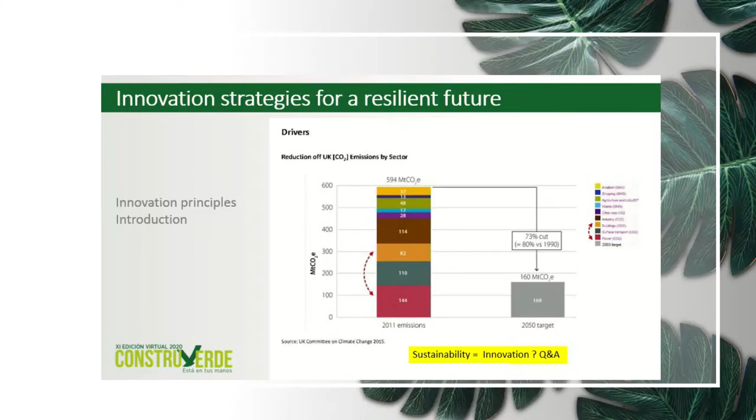This goes hand in hand with poor productivity in the construction industry. Again, an example from the UK as an average, where we now have an industrial strategy trying to help the sector move forward and improve a systematic issue of productivity, shortage of skills, and also inefficient building operational aspects, both on the building scale and the infrastructure.

So that gets us to thinking about how do we make those changes. I think what's quite interesting is looking at other industries and the definition of innovation. It comes from the Latin innovare, which means to make something new. That can happen in different ways based on different drivers. When we look at different industry entities, they position themselves quite strategically and clearly as it relates to basic research, breakthrough innovation, sustaining innovation, or disruptive innovation.

Now what I think we really need is a transitional model where we get from disruptive or breakthrough innovation into a sustaining innovation model, that then applies to different residential form and massing typologies, different age and context related typologies, or different ways of operating those buildings. That can essentially be currently mainly active, or passive, but what is probably most likely is that we see hybrid operational modes, where buildings utilize on-site resources but also draw from the grid or feed into the grid. Then we see programmatic categories and typologies, where I just want to talk about the residential for a moment. But it's important to understand the achievements we want to realize in these different sectors will differ depending on typology, program, and building use.

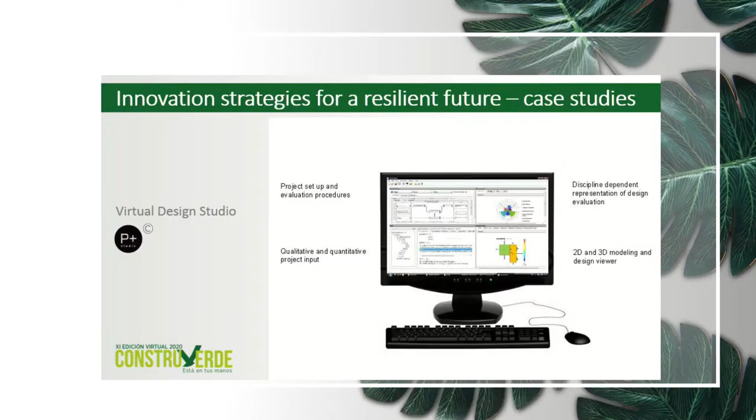We've used this for several years in our teaching, with interdisciplinary teams of students from architecture, mechanical engineering, structural engineering, and so on, exploring case studies based on this rationale, going through the motions of testing certain performance-based design ideas.

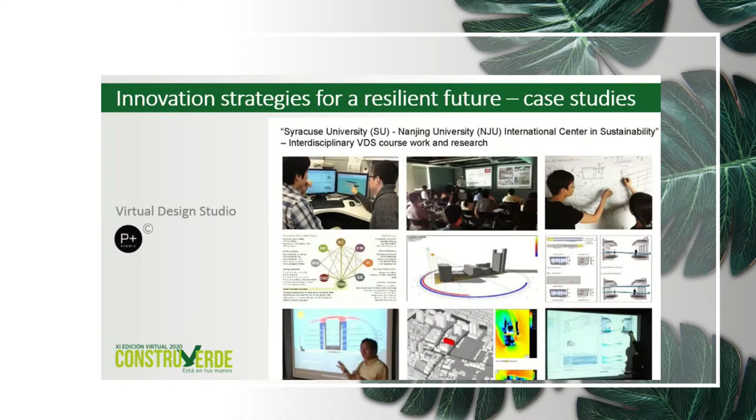If you're interested in learning more about this particular project, I recommend looking up Building Simulation, an international journal where we published this. You would find it under Virtual Design Studio, Part 1, Interdisciplinary Design Processes.

Work that we're currently doing at Cambridge, where we're looking to expand on this rationale by introducing aerospace value assessment methods, essentially a way of looking at the built environment very differently using aerospace design logic.

What we basically argue here is that the rationale in designing highly complex aerospace components could be applied to the design assumptions that we're making for buildings.

We're currently looking at what that can look like in terms of systems platform, but also in terms of visualization methods that we can learn from, because they can compare simultaneously a whole range of data sets and value systems, which is quite powerful.

Again, a paper from the SBE 19 conference. If you're interested in learning more about this approach, you would find it under Architectural Design for Optimized Performance, Supported by Value Assessment Methods.

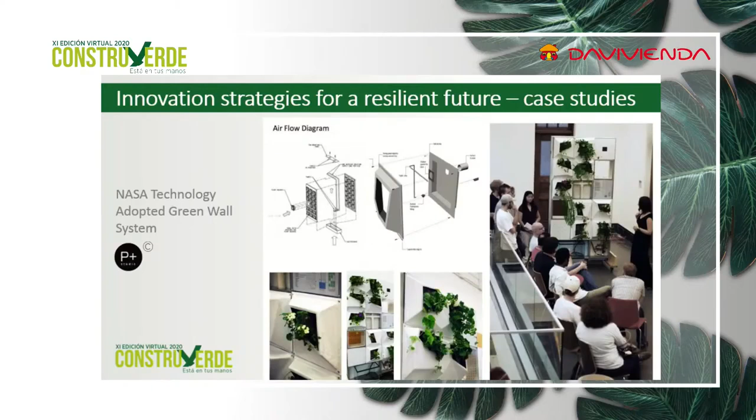Aquí vemos el producto terminado, que es esencialmente este muro con las matas. También tiene un carácter como si fuera una exposición. Entonces pueden ver ustedes el ducto.

En la siguiente diapositiva vemos los diferentes componentes y cómo producen un manual. También tuvieron que sacar un manual de usuario para el uso de la ventilación y la circulación de aire, y luego los tanques de agua a la izquierda. Realmente es un sistema plenamente integrado que tiene que ver con las necesidades del edificio, y realmente una gran lección para todos en este proceso.

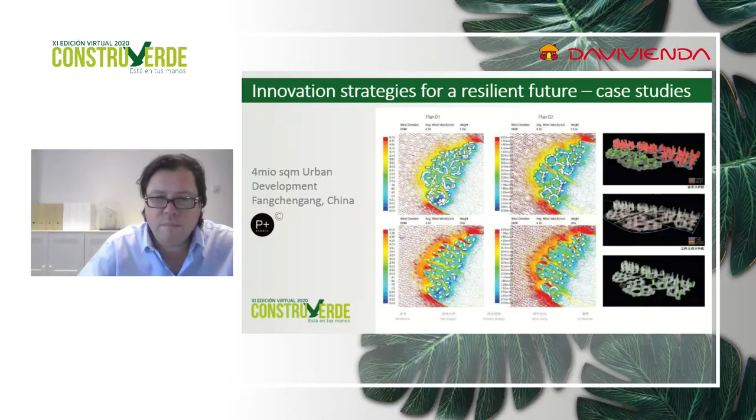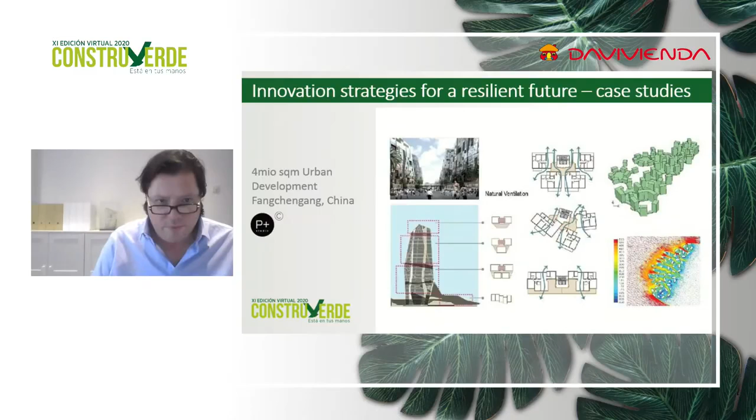¿Qué vemos aquí? En esencia es una resolución donde tenemos en la parte superior, arriba, como un cañón de viento, donde tenemos avenidas a lo largo de estos 2 niveles del flujo de viento. También tenemos la configuración del edificio y los espacios que hay, que respiran, porque realmente el edificio es como un pulmón, pero también hay espacios para interacciones sociales en edificios tan altos.

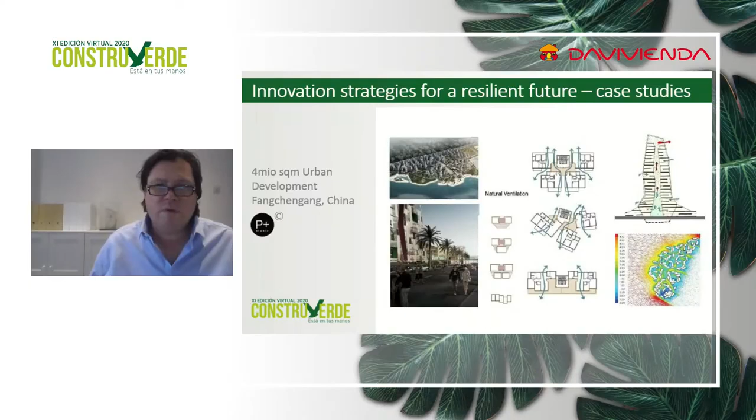Lo que vemos aquí también es la resolución arquitectónica, cómo son los edificios realmente. Y la idea aquí es tener un paisaje tridimensional, donde literalmente tenemos las partes que se unen al edificio y espacios que se convierten en áreas sociales para diferentes usuarios, para que se reúnan. Y se dan diferentes pisos.

Y aquí vemos la parte final. Vemos cómo llegamos en solo 4 semanas al final de este proceso, y entendemos qué tipo de tecnologías, de nuevo, activas, pasivas e híbridas podemos usar, incluyendo para este sistema del muro verde.

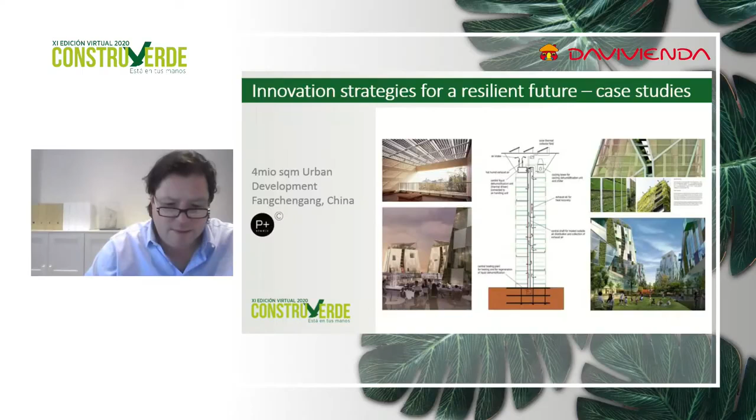Y en la siguiente diapositiva podemos terminar, me imagino, con esta idea: si no tenemos una manera radicalmente diferente en cuanto a un futuro resiliente, no tendremos una buena innovación bien manejada. Eso de los cero carbono no se nos va a dar dentro de 30 años.